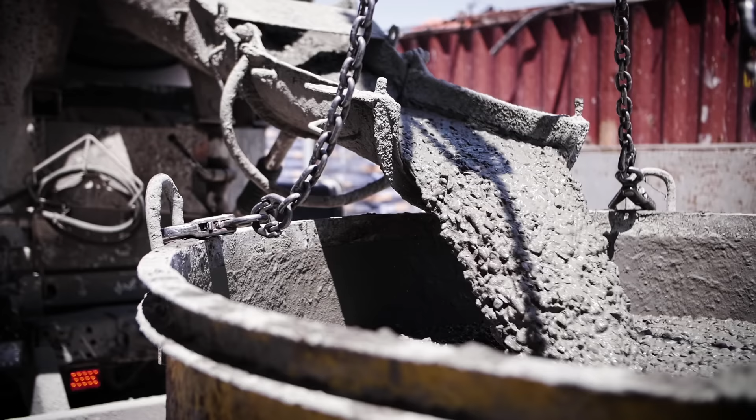I think we have a complete disregard for our environment. Water's drying up, which is kind of silly because it rains all the time everywhere. 35 to 38% of the greenhouse gases are produced by just 5 materials.

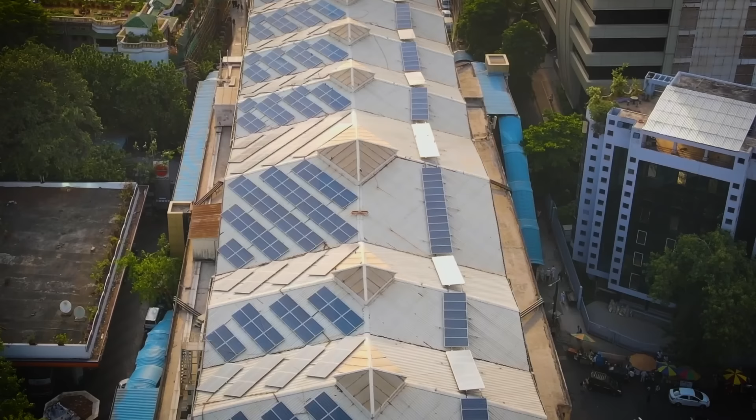There's so much research around solutions, so where is that gap? We have found more than 25 ways of building earthquake-safe buildings without using cement. What will people pay for? People will pay for design. We thought of coming up with a model solution that can be easily replicated.

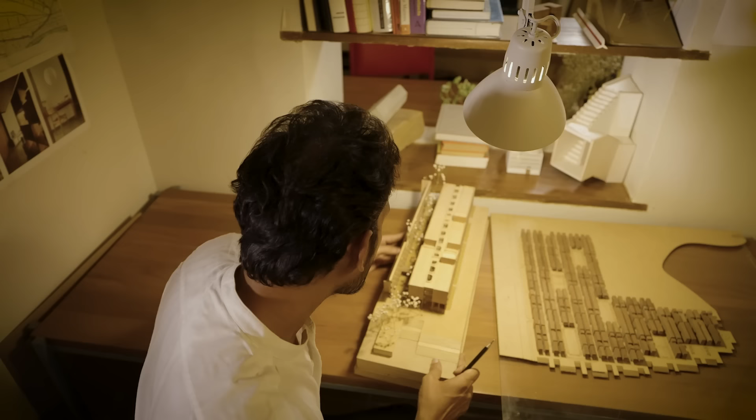With analytical tools available, it really makes sense to use data to optimize design. We're facing a climate emergency, but it's not irreversible if we act swiftly and decisively. I wanted to build an Uber for waste. Every bit of waste is a resource.

The footprint of this project is hardly 20% of the entire site because the unbuilt is as important as the built. Very quickly, I learned that the person making the big decisions was the person who is controlling the money. I think adaptive comfort has to come back into picture. You have to talk to the people. If you want the project to reach somewhere, you have to involve them in the process.

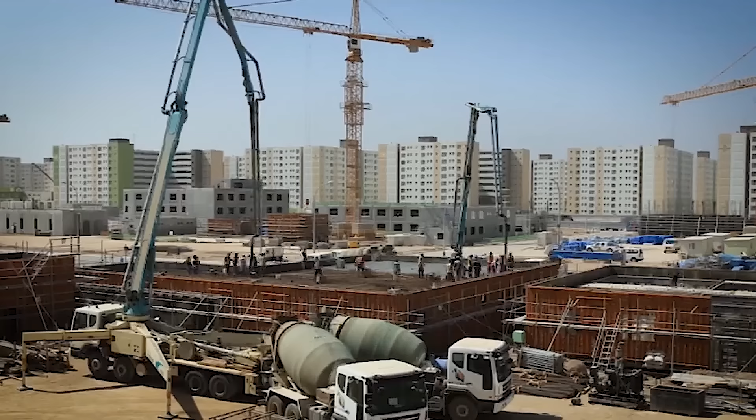Tiling industry is massive. Even if you change 10% of it, there's a huge carbon emission saving that we would do. Now, this is suddenly sustainability that is offered not at a premium. Disruption can bring the world to its knees, but it can also breed innovation.

By 2030, there'll be 43 cities across the globe with a population of 10 million people or more. That's up from just 10 such cities about 3 decades ago. To accommodate this massive influx of people, we need a large volume of new housing, schools, factories, and more. But with limited time, capital, and land, we need cost-effective solutions that are quick to construct, easy to replicate, and most importantly, solutions that lend themselves to adaptation.

That's what we're discussing today with Avnish Tiwari, founder of At Architecture, a Mumbai-based practice that is taking this challenge head-on with a slew of award-winning projects from Russia to Cambodia. So Avnish, what I want to start with today is this project I just referred to in my introduction, which is a 3,000-unit residential development in Cambodia that won you the United Nations Development Programme competition. Who were you designing for? What was the brief like? And how were you able to ensure that this project or your proposal was, in fact, scalable?

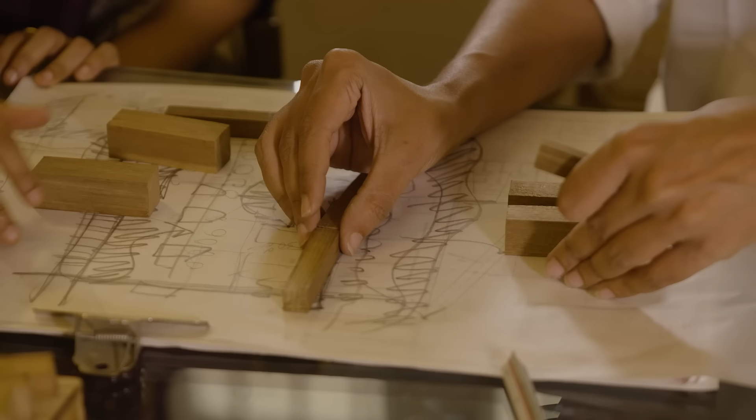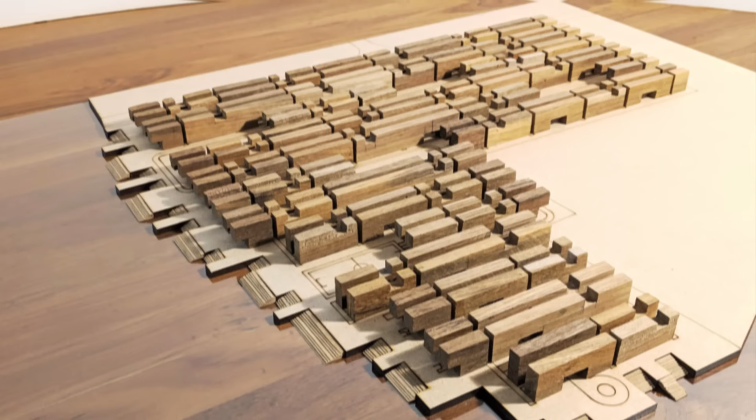So for this project in Cambodia, the key requirements were affordability and security for factory workers, with 2/3 of them being women migrants. The project is a part of Phnom Penh SEZ. While designing this, we thought of coming up with a model solution so that the project can be easily replicated, scaled, and can be appropriated to similar context. So at a master plan level, we wanted to create a cluster or a module which has certain collective facilities. The clusters are developed as a self-sufficient unit. When these units are repeated, these clusters' infrastructure also gets scaled or repeated.

So you spoke about these twin objectives that you set for yourself, which is number one, affordability, number two, security. So let's go one by one. The first thing is affordability. How do you create affordability? In terms of cost efficiency, there are two main aspects. One is the geometry of the layout. We tried to have zero offsets in the layout, developed a cluster which is very compact. Most of the walls and structural members are shared between the apartments. In terms of structural efficiency, we came up with the idea of composite structure, which is a mix of RCC frame structure plus load-bearing walls, which are made from the locally available clay bricks.

And even internally, you're designing these apartments. So are they flexible layouts? So if you look at the layout, there is a specific zone of living and the utility wet areas. The wet areas contain all the services together, which also has a kitchen, pantry, everything. And in the living areas, you have a series of living room, bedroom, living room, bedroom. So in terms of flexibility, it is very open. All the structural members are only in the periphery, and in between there is only one column which can be easily aligned with a cabinet or storage. So it can be converted into a dorm or an apartment for a family.

Now, specifically for the user group that you were designing for, was there something that you did in terms of creating a more secure or inclusive environment? I think this was the main challenge. Affordability and sustainability were given, but this is something that we extracted from the brief, from our understanding. So for safety, we came up with the idea of a series of courts which facilitate interaction amongst users and between each apartment.

We have two sets of courtyards. One is a larger courtyard which we call the community courtyard, which is enjoyed by all the living spaces of the apartment, living rooms and bedrooms. And on the other side of each apartment, there is a smaller courtyard called the utility courtyard, which is shared by all the wet areas and service areas like pantry and toilets, and this also becomes an entrance to each apartment.

We came up with the idea of kitchen gardens, which become part of this utility courtyard, and the inspiration came from our study in Cambodia, from their households. There we found that however small it is, they generally have a small kitchen garden in front of their house or apartment. So you also did a very similar project in Russia.

Now, when you move from this context of the global South, Southeast Asia, Africa, the Cambodia example can actually be replicated in such climates. But when you move to Russia, what are the different challenges and requirements that you're building for? The climate is something which directs how people live as well. So their living pattern was totally different from the people for whom we were designing in Cambodia or in Asia.

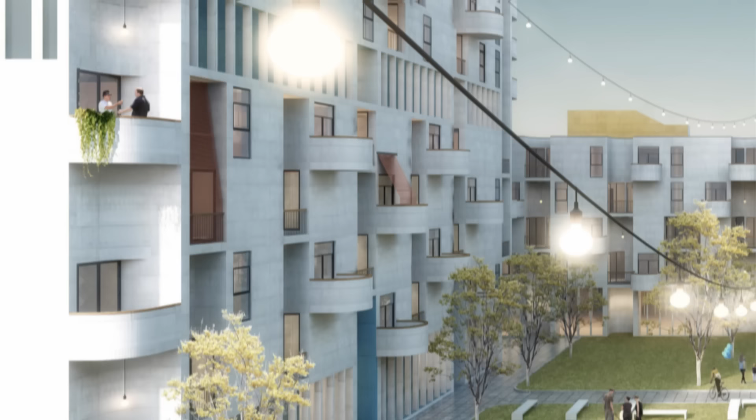We wanted to give them openings on the facade, but at the same time we wanted them to also enjoy a space which is outside, which is also a very common culture in Russia. And this is where the idea of sunrooms came in. We thought of designing a series of balconies which are not only single height stacked on top of each other. Instead, they are all at least double height or three floors, so that the opening is higher, and it also allows deeper sun to penetrate into an apartment.

Which is also a great exercise where you can limit the amount of energy that people have to consume to heat up their homes, because the sun actually penetrates deeper into the house. Yeah, that was the main idea behind doing this. But there's one commonality between the Cambodia and Russia housing. Both these structures were very compact. If you want to cool down your place, or if you want to keep the heat intact, it's ideal to have a cluster which is very compact. So that is what worked in both of these projects for us.

And also the orientation. In Cambodia, we oriented each apartment with no east and west exposure. But here, we have east and west exposure, so that there is more sun exposure to the facade of an apartment. I think another interesting thing I noted is that while you have a composite structural system in Cambodia, what you're using in Russia is concrete. Right now, in my head, I'm thinking, why are you using so much concrete when you want to create sustainable and affordable proposals? How do you reconcile concrete with all of that?

Every structural system that we propose for a project arises from the requirements themselves. Cambodia was low scale, maximum four stories, but there also we could not go completely load bearing. We had to use a composite of frame and load bearing walls. Whereas in Russia, most of the units were actually high rise. And if you go higher, your structural members become bigger and bigger. If you are making a high rise building out of concrete, these concrete walls can become shear walls, and they can become a load bearing structure themselves.

And concrete, compared to mud or brick, requires a much smaller footprint to carry the same amount of load. So these were the two main things. And there's another very important thing. The thermal mass of concrete is very high, so it retains heat. If you make a completely concrete structure in Asian countries or a tropical climate, exposed to sun, it will trap heat, retain it, and emit it at night when it gets cooler. But this is what we want in Russia. We wanted this concrete to contain as much heat as possible. So thermal mass, structural stability, and strength made us decide on concrete.

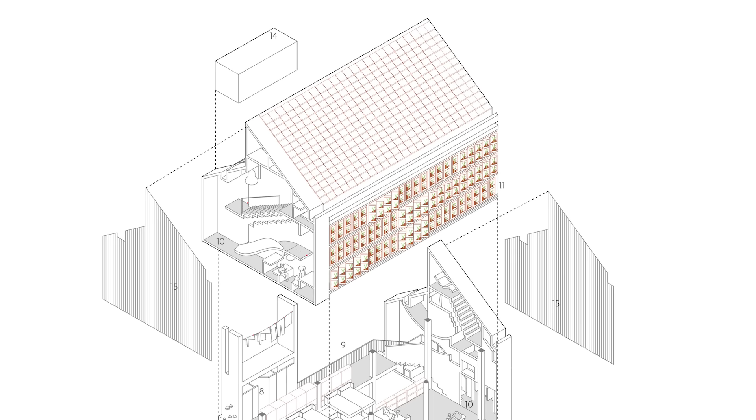So what you mentioned in the Cambodia project, this idea of kitchen gardens inspired by the typical conventional living systems you saw there, I think that's a thread that also comes in, because yes, sustainability requires scalability, and that requires solutions to be generic enough that they can be replicated. But you also want to ensure that there's some level of joy and delight depending on who is using it. And I think with the orphanage you designed in Thane, that comes across really, really beautifully.

So for us, I think for our practice and the way our practice is evolving, we have realized that there are three main aspects for which we design any project. Of course, efficiency is one very important thing in each of the projects. Second is sustainability, and third is delight that you bring in through your design. And that can be achieved by making something which is aesthetically pleasant.

And for the home for marginalized children in Thane, there was not enough play for us to work out anything which is totally new. Being a part of a high density slum, we had to make sure that each and every square feet of the site is utilized for the function. But at the same time, we were also trying to create something more interactive and playful for the age group of 3 to 14 years old.

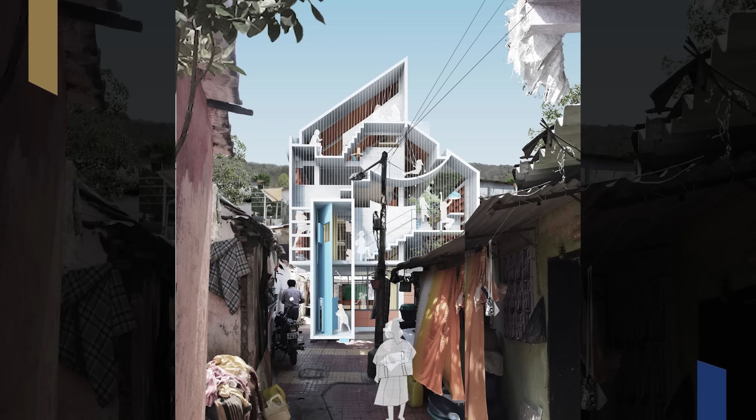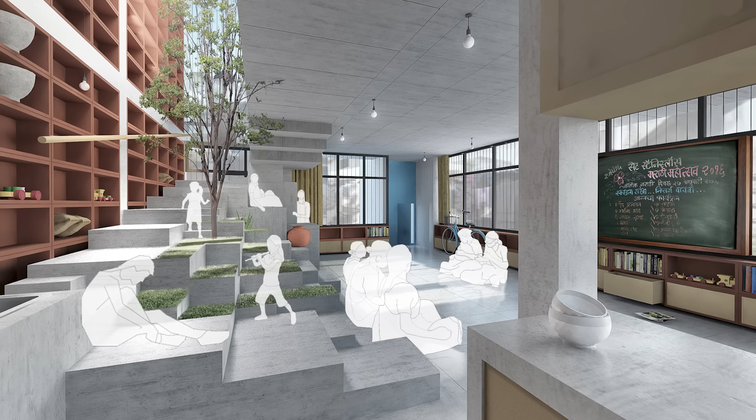Again, in terms of orientation, we had 3 sides open. The only play that we had was the overhang of the window chhajja, the weather shade of a window. We started articulating these windows and made them into a recreational space just by molding chhajjas in different shapes and forms. And they also become functional spaces for kids. For example, they could become a desk for them to study. They also become a stairway, a shortcut for kids to go from one floor to another, because it has a series of levels which can be navigated in different ways.

And on the southern side, we came up with the idea of making a green wall first, but then we realized the budget is so tight. So we converted the same green wall into a nursery, which will be grown by kids as vocational training. And the client found out that the revenue generated from this nursery was enough to look after the upkeep of the entire structure. We also had to create a facade, a terracotta louver, in which you are able to access these plants, but at the same time you are also able to shut your window.

I think that also leads to another project that you've done, from this dense, slum type environment in a dense city to a very remote environment in Meghalaya. Again, you're working with very similar tenets, which is how do you use architecture as a tool for creating economic opportunities? So how did you actually get involved in this?

After winning a UNDP project in Cambodia, we were fortunate that an army veteran got in touch, not for the jackfruit processing unit, but for another project. He wanted us to make affordable housing in Meghalaya similar to what we had proposed in Cambodia. That project did not work out, but we stayed in touch, and eventually he got this project, which is run by a cooperative of 50 farmers. What is the brief here? Who are you designing for? What is the need of this project?

The primary requirement of this project was to process jackfruits. In Garo Hills itself, around 100,000 metric tons of jackfruit gets wasted every season because of the lack of infrastructure. And the shelf life of jackfruits is also very short, so it cannot be transported. So it's ideal to process them so that the life increases. And this is how the program derived. So what were the unique requirements that this presented in terms of who was going to use these buildings?

And the day we visited, we found out that a major flood had happened just before we arrived, and the only existing bridge along a river very close to the site got washed away. These things started directing our approach to the project. Our site was also already low lying. We had to make a structure raised on a plinth, and we wanted to create infrastructure which caters to this village and neighboring communities in times of disaster. So along with the processing unit, we proposed a dedicated community space which will remain open 24/7 without disturbing access to the factory.

So more recently, you achieved a lot of recognition for your work on the Northeast Pavilion that you designed for the Surajkund Crafts Mela.

And it highlights another very interesting thread in your practice, which is you're trying to promote certain ideas to the larger mass of people, more sustainable ways of living, more ways of engaging with the natural world, and hopefully then preserving it. There is not one single solution or one single material which we can call sustainable and which will work for everywhere.

So every site, every program demands a certain response or certain solution. So this is what we try to achieve through our projects. Whatever project we get, we try to find these narratives which come from the site itself, from the user, from the program. Particularly with the project Bamboo Pavilion in Surajkund, there we were not only asked to make an architecture like a structure, but we were also responsible to curate the art form of the Northeast.

So to start with, we thought, first of all, the architecture itself should represent the craft of the Northeastern region. And as we all know, bamboo is very traditional, and you will find almost every state, all the 8 states of the Northeast, having bamboo dwellings. So the architecture itself becomes the representation of the craft that they have. And the second thing that we did through this project was we created different galleries where we brought artisans from all these states, tribal artisans, to demonstrate their life to the people.

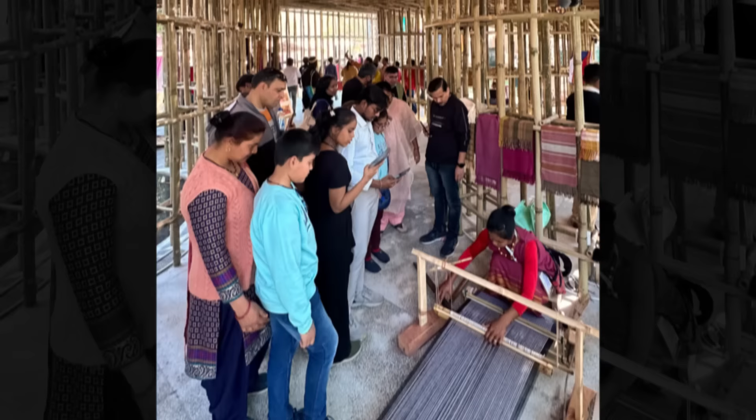And these two things, first, also bring bamboo into the mainstream, and at the same time these indigenous artisans, craft people, were able to travel and display their work. So it was also a conservation of an art form which is slowly dying in our northeastern states.

I think what you did very similarly was in this Guwahati project on the riverfront, and there's rejuvenation of a lake. Again, it seems like you're trying to promote a certain way of living and of engaging between humans and nature. Yeah, absolutely. In the Pavilion project, we connected visitors and people with the artisans as well as nature. Here we were able to connect people with the water and the beautiful landscape present along the edge of the Brahmaputra river.

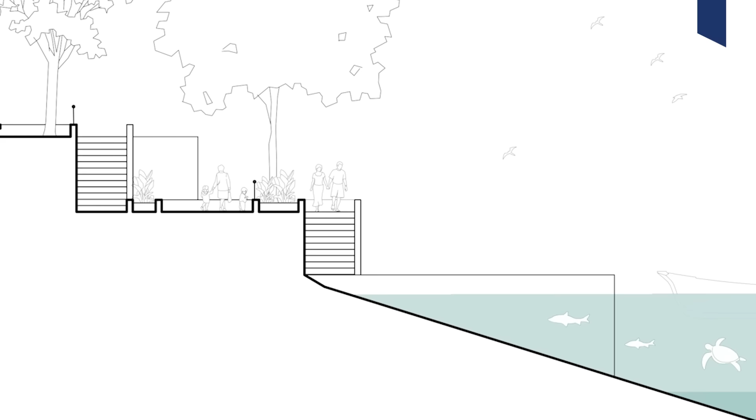When the brief came, we were asked to create a landscape, but we were also asked to create a very big promenade overhanging onto the Brahmaputra river edge. And our site is around 10 to 12 meters above the river level. So we tried to come up with an idea where you extend yourself towards the river, but at the same time you stay grounded. So we followed the edge, the riparian edge, and we slowly created pockets and terraces which take you closer to the river.

For this project particularly, we thought of having the least amount of construction. The construction is limited only to circulation, and we have created a series of step pavilions which connect people with the water. In a very tight, dense urban neighborhood, this has become like a breathing space for the residents as well as the visitors. The other important thing that we did is we tried to preserve everything that was there. We tried to revive the native flora as well as fauna through horticulture.

When we visited the site for the first time, we realized there was a beautiful lily pond, but there were very few butterflies around. So our horticulture landscape detail actually involves all these. It is more of a conservation of nature, we can say, and bringing back the native landscape.

So I think now as we end, I want to bring up the way that you've practiced. It's been driven and fueled by your participation in international competitions. That couldn't have been easy, right? So how has that journey been, and what do you foresee for yourself and for the practice in the future? When we began our practice, we struggled a lot, like every other architect. The culture of competition is not very healthy, and most of the competitions are generally invited, and they don't encourage young practices. So this leaves us with a handful of competitions which are open for everyone.